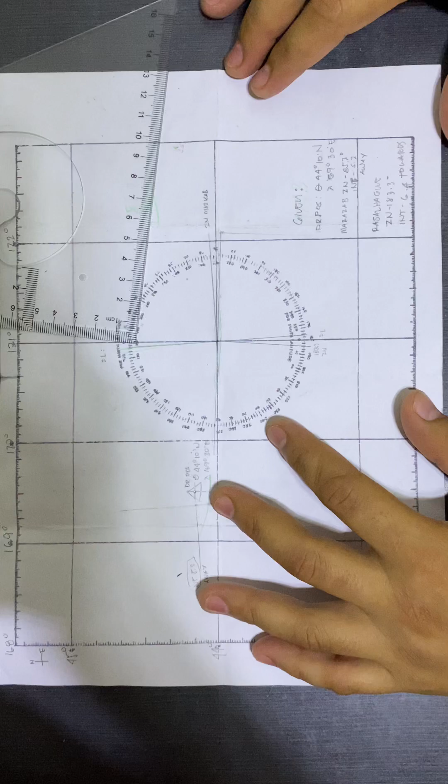So mo ni siya atong given guys for plotting the stars and our fixed position. So first, this is the given for our DR position, dead reckoning. We have latitude of 44 degree 10 minutes north and longitude of 169 degree 30 minutes east.

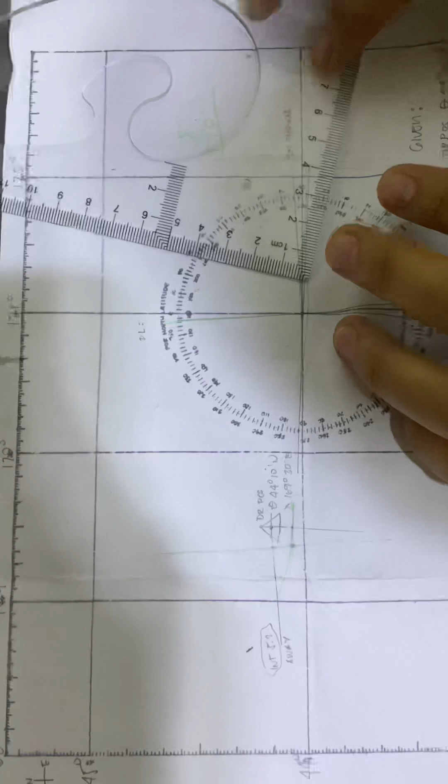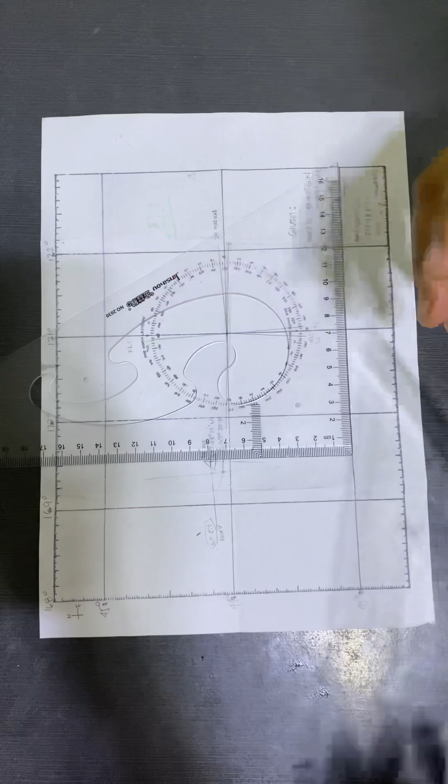So first, we're going to get our DR position. To get the DR position, as you can see here from this scale, we have the 169 degrees, and by this scale we're going to count by 5: 5, 10, 15, 20, 25, 30. This is the 30 minutes and 44 degree 10 minutes north. So now we have our DR position. So this is our dead reckoning.

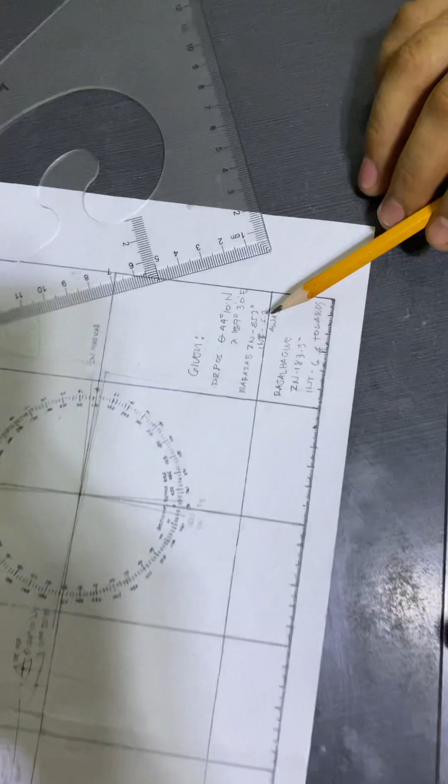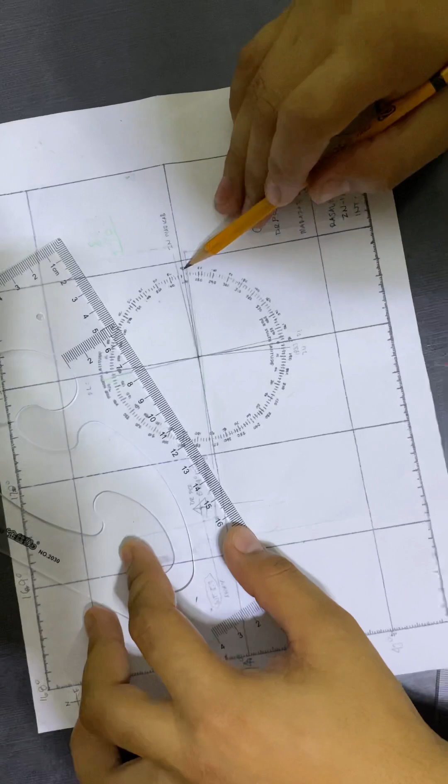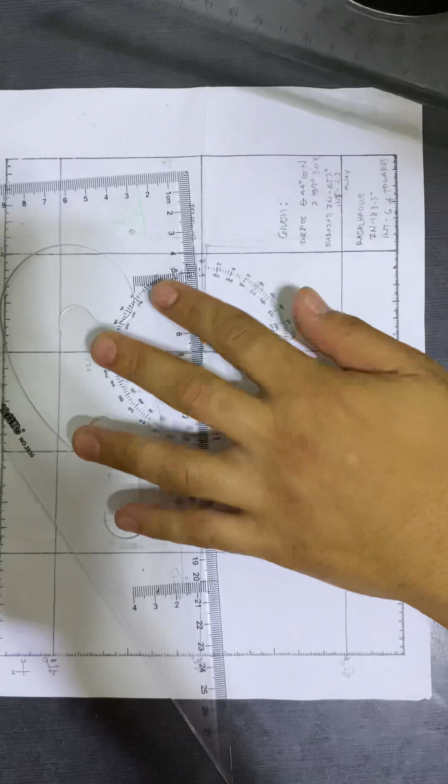So next step is we're going to find the Zn of Markab star. So first, we have the Zn of 85.2 degrees. So we're going to get the 85.2 degrees from this compass. So this is 90, and this is 85.2 degrees. Next step is we're going to drag this line to our DR position.

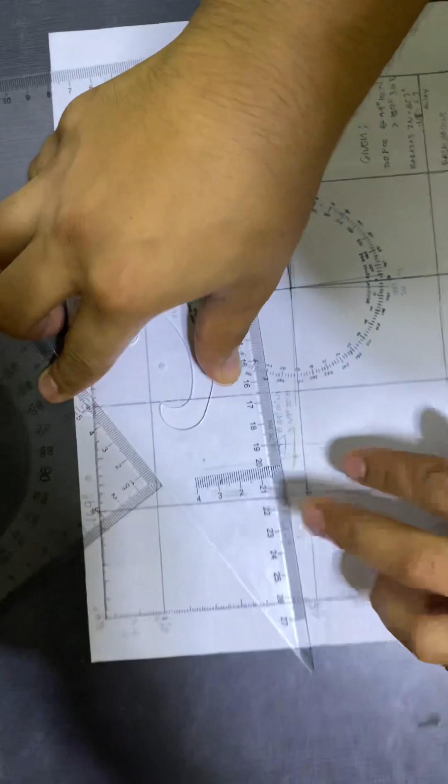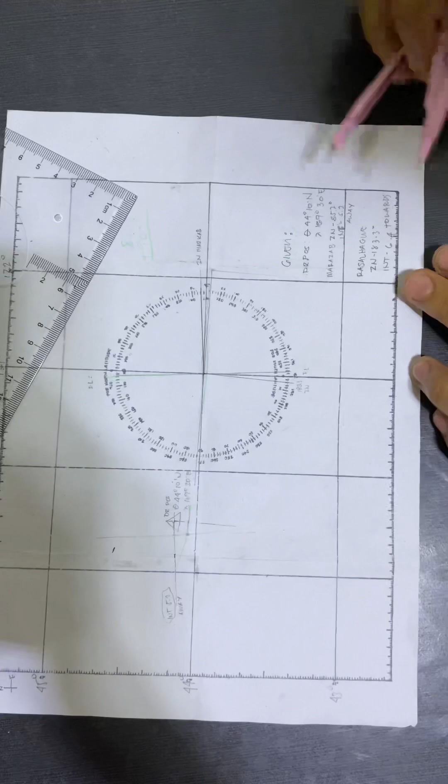By the way, this star has the intercept of away. It is away from our ship. So we're going to draw this line from the Markab away from our position. And next step is to find the intercept. Intercept is 5.2. So to get the 5.2, naaro na siya diri. 1, 2, 3, 4, 5.2. Oops, diara.

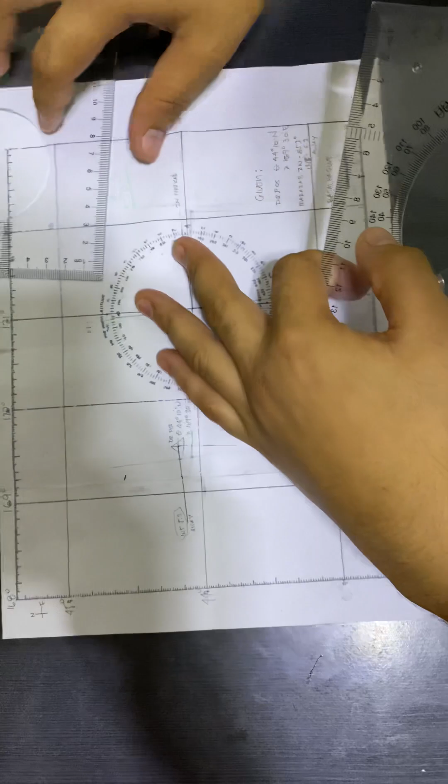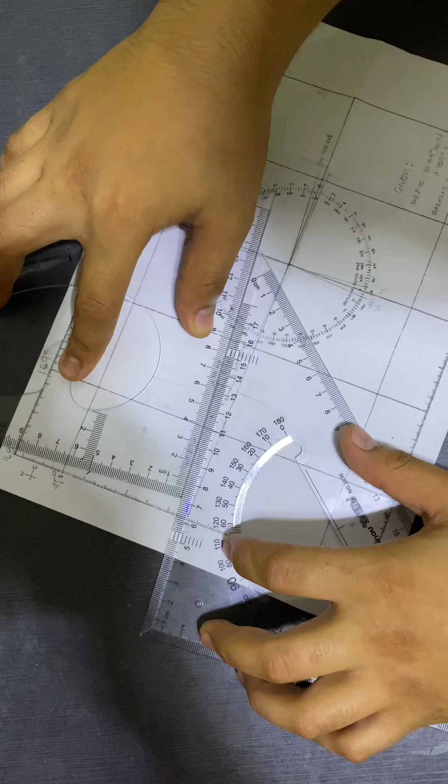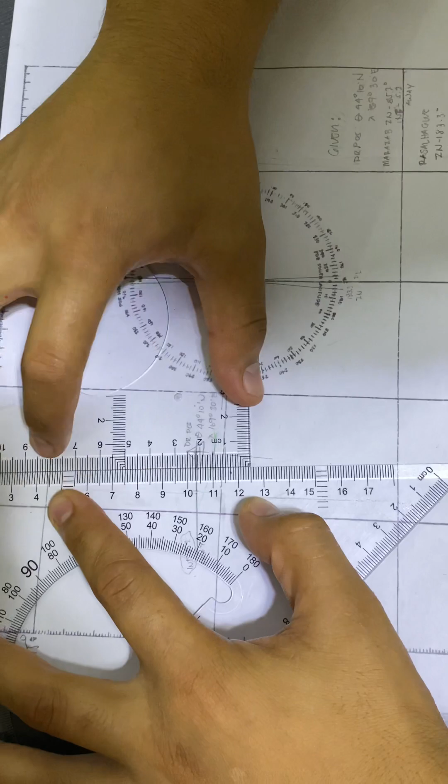So now that we have our intercept, next step is to get the 90 degrees angle. So now this is our 90 degree angle. Next step is to drag this line to our compass to find the PL to the center of the compass.

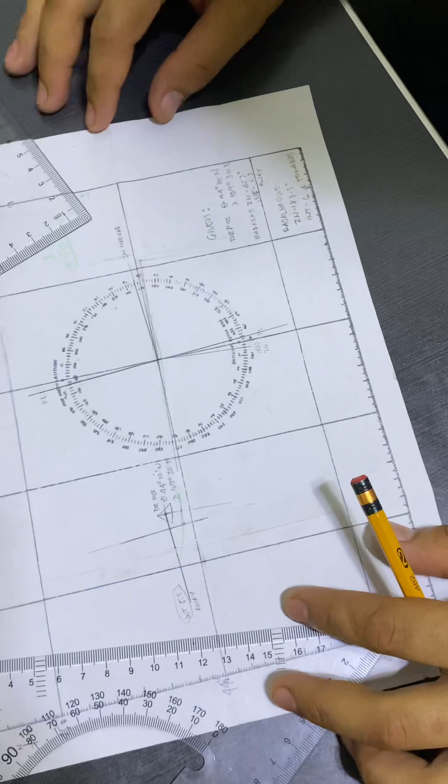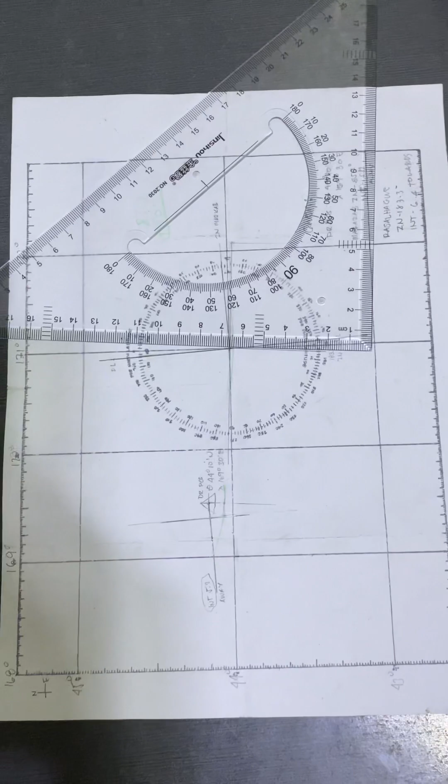So next step is to locate the other star. We have a Zn of 183.3 degrees. So this is 183. This is 180. So here we find the 183. And then we're going to drag this line to our DR position.

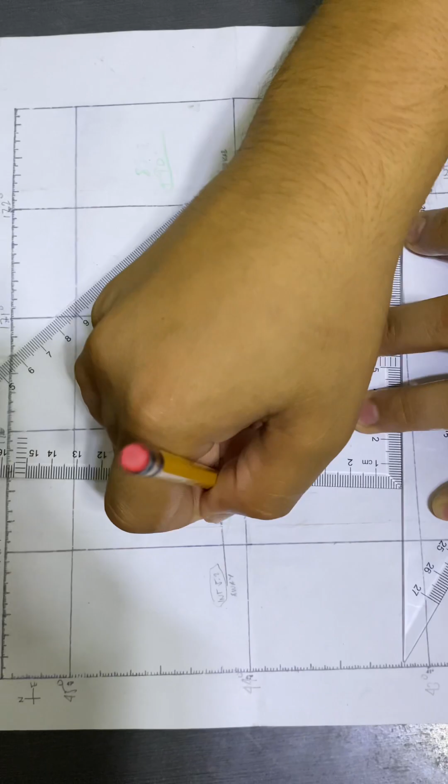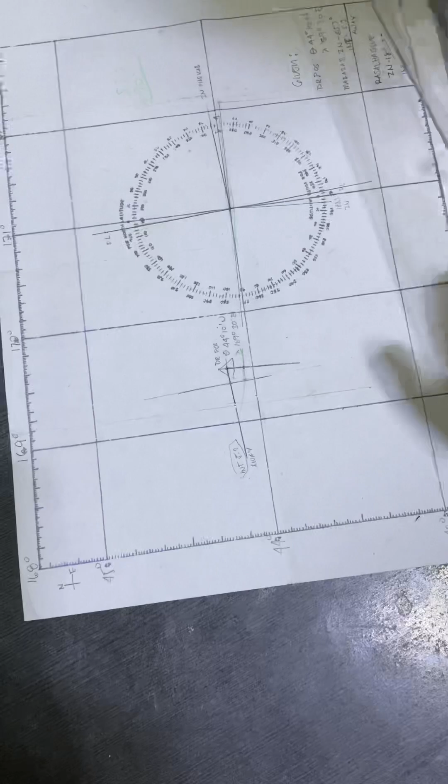And next step is the intercept. And by the way, this is towards. Intercept is 6.4. So again, we're going to find our intercept from here. 1, 2, 3, 4, 5, 6. And next step is the 90 degrees. Now we have this line here. It serves as another PL. Going to indicate this as PL.

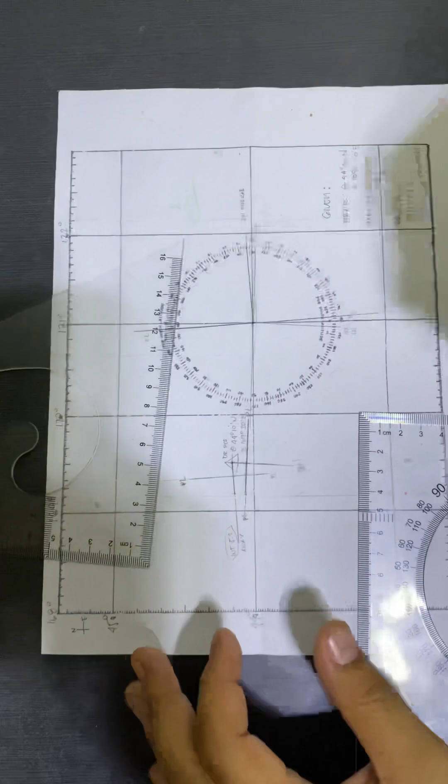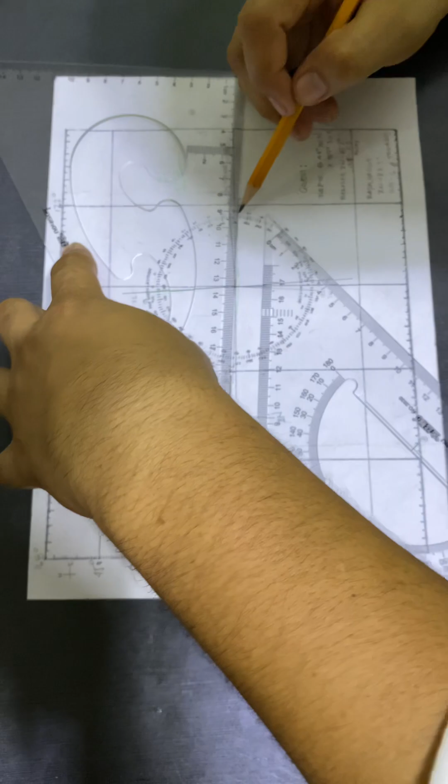No, this is Zn. Now, almost forgot. This line here, drag it again to our compass to find the PL. So now this is our PL for Rasalhague. Ambot, di ko kasabot sa basa diyan.

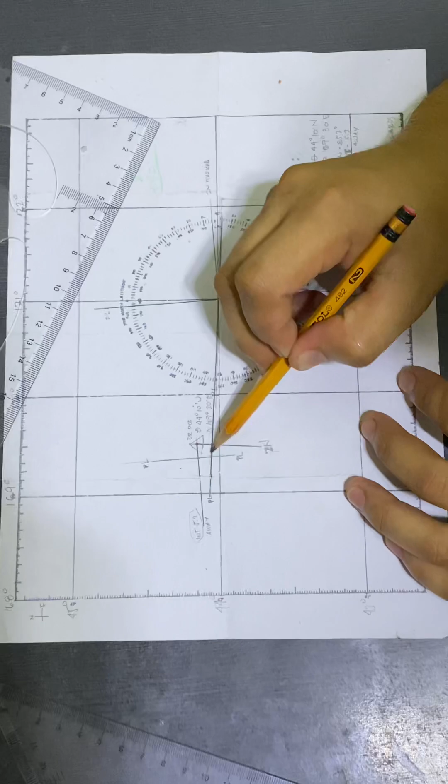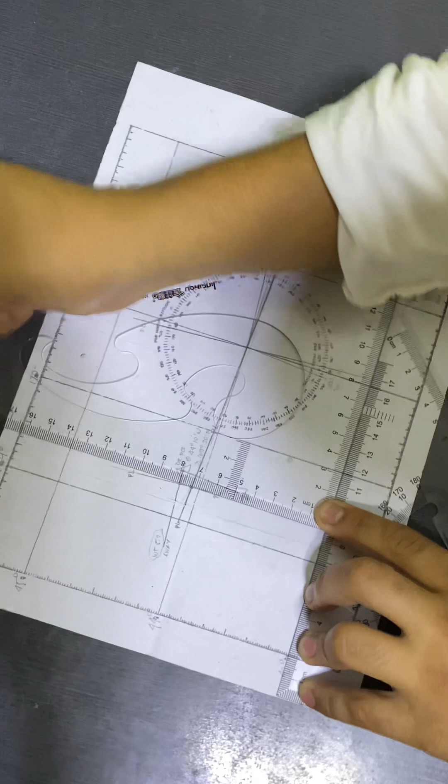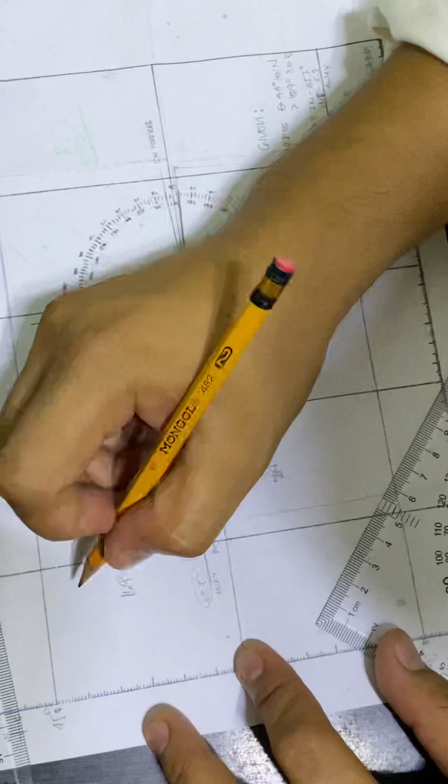So from this intersection of our two PLs, from the Markab and the other star, this is now our fixed position. So we're going to measure this from this scale again. We have 5, 10, 15, 20, 22. Our fixed position is 169 degree, 22 minutes east for longitude. Now for the latitude, our latitude is 44 degree and 1, 2, 3, 4, 44 degree 04 minutes north.

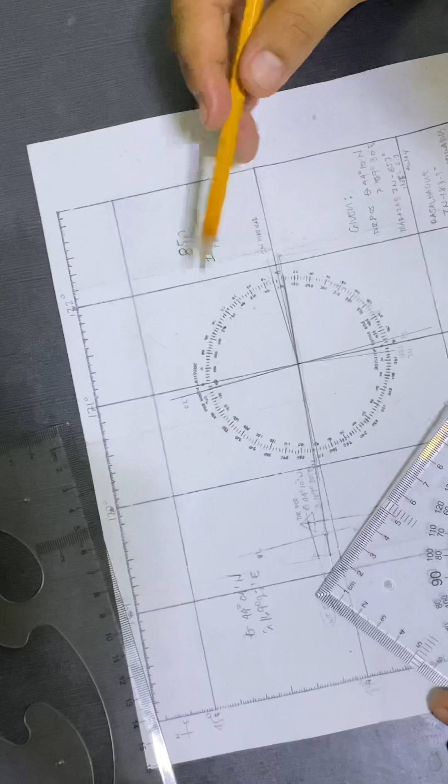And also the simplest way to find our PL is to add 85.3 plus 90 equals 175.3. So this is 175.3, which is checked for the PL from the first star. And wala to, sakto na siya.

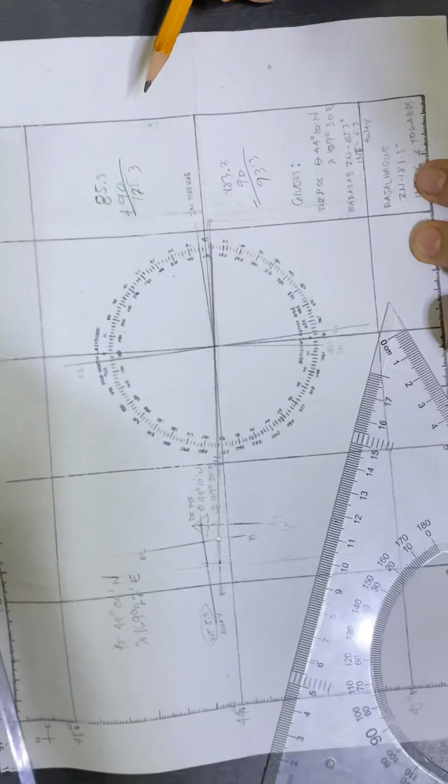For the second star, it is 183.3 minus 90, so 93.3. Okay siya. This is the PL for the second star. And I think that is all.